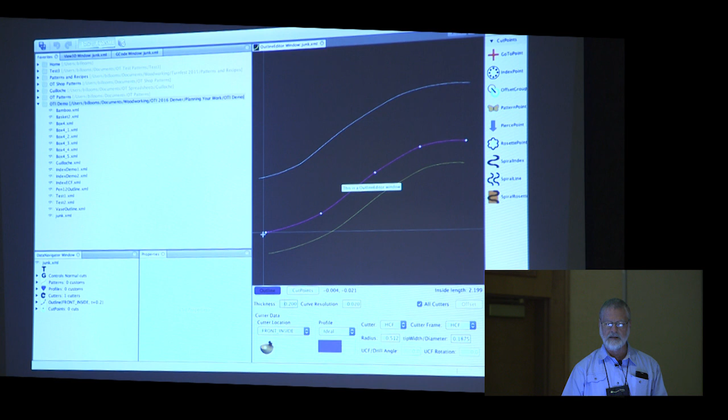The dots are digitized, so now I've digitized the inside of a shape. I could also clear that out and digitize the outside of the shape down here. If you can't see the arrow, yell at me, I'll grab the laser pointer. We can digitize the front inside, the front outside, the back inside, or the back outside. So here I'll make the outside of a vase.

You can take any of these points and drag them to change the shape to anything you want, and you're seeing the inside and outside of the curve.

Let me change this back to a 0.1 inch shape. If you don't want a point, just click it, drag it off the screen, and it goes away. Double click for more. If you want a sharp transition, like a sharp edge, more points are usually required to get a nice sharp edge, because that's just the way curve fitting software works.

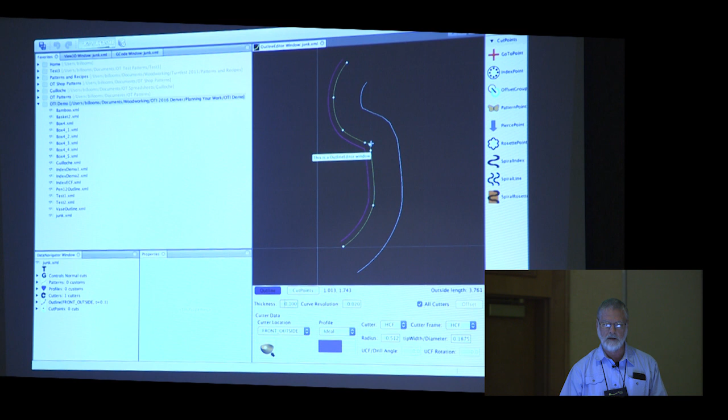If you want a sharp shoulder, see how I've got three points there that are fairly close together? That's how you get a sharper bend in the curve, because otherwise it will just try to smooth it out. That's just the nature of curve fitting. You can delete the points and take them off the screen.

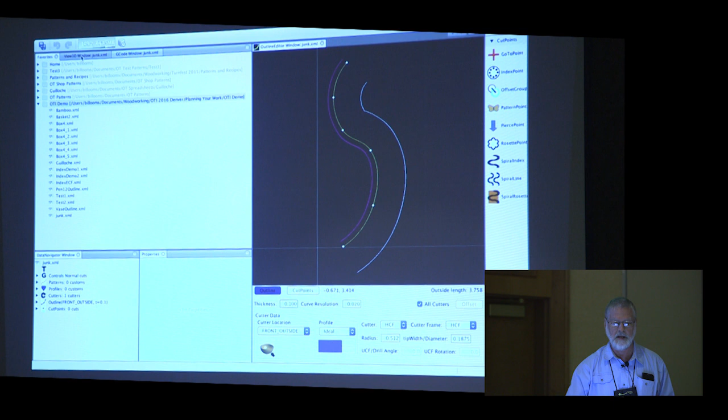Now, next thing you want to do is see what that looks like in 3 dimensions. Over here in the top left, there's a tab that says View 3D Window. So there's my shape in 3 dimensions with light sources on it.

Both of these windows you can zoom in, zoom out, and pan, and in the 3D window you can zoom and pan back and forth, and roll it around just by clicking and rolling it. There are several light sources in there, so if you get lost and don't know where you're at...

there's a reset. Now when you're looking at the 3D window, you can either be looking at the inside or the outside. Right now I'm looking at the outside shape, where my cursor is right down there. You can select either viewing the inside or outside.

Well, the inside of a vase like that isn't particularly interesting. It would be interesting if you're decorating the inside surface there. So if things don't look right, just make sure you're selecting whether you want to view the inside shape or the outside of the shape. And you can get rid of that grid if you want, or leave it there.

You can save that view. Just take a snapshot and it'll prompt you for where you want to save it, so you can grab a nice picture of that. So that's what the 3D view window is about.

The nice thing is you can change the shape and instantly see what's happening. If there's a little bit of a bump there and you say, well, I want to get rid of that bump, okay, so you can design a nice looking shape and save it.

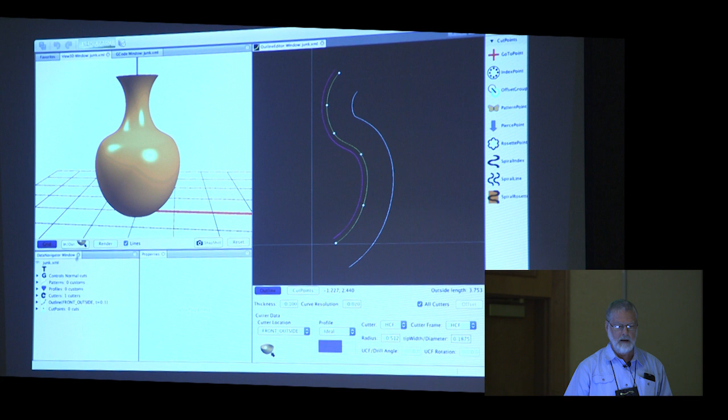Okay, now the next thing we want to do is add a simple cut. I'm going to go back and open a file that I had before, test 1. Here's a vase, and I've put a rosette point on it. Let me take that off and show you how you get that.

Off to the side, there's all sorts of cuts: index cuts, spirals, rosettes in particular. You want to use a rosette cut, like with the UCF, drag that and drop it on the curve. What these lines represent is the dashed yellow, representing the tip of your cutter that's spinning.

Now you have to know what the diameter or radius of your cutter is. Down here in the lower corner, we have a horizontal cutting frame. I could change that to UCF. Here's the radius of my cutter, which I happen to have now. Horizontal cutting frame, the diameter of the tip, and so forth. The profile on the tip, we'll talk about that a little more later.

So when I have a radius of 0.512 inch on my particular UCF, this white line is going to be 0.512 away from the outer curve. So anywhere that the center of the spinning cutter is, it's going to fall on that line, and that dashed yellow line represents the tip of the cutter. It's just going to be barely touching the shape.

That's sort of the reference point where you start. The yellow arc represents the cut at its very deepest point. The green represents the cut at its shallowest point, which in this case is up in the air.

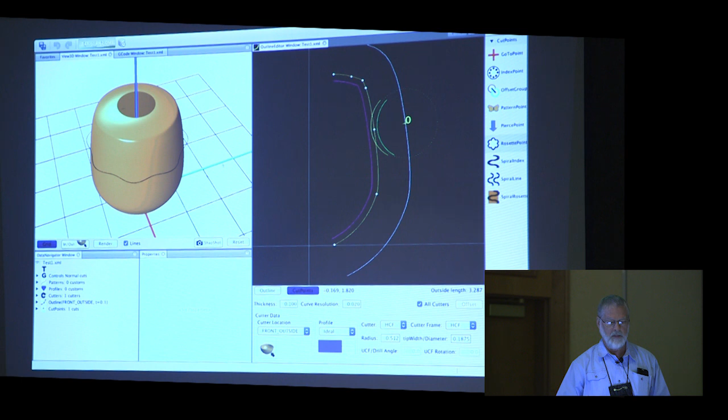And then you hit the render button, and you'll see what that cut looks like. And so you say, well, okay, that's kind of interesting, but I didn't intend for it to be cutting in the air. So we can change any aspect of that cut. In particular, I'm going to make it deeper.

Now, this Data Navigator window over here, you can edit any information that you're storing in the software, and this properties window lets you type in a different number. In particular, if I click on this outline, here's all my points that represent the shape. You can manually edit that.

For example, this very bottom point, it's not right at 0, so if you say, oh, I want that to be exactly at 0, come over here and just type 0, fine. Now that shape is all the way down at 0.

So you can select anything, and in the properties box here, you can edit just about anything. So the outline, you'll often want to edit. Now the cut point, first thing we want to, there's a lot of information we can change. We can manually change the location.

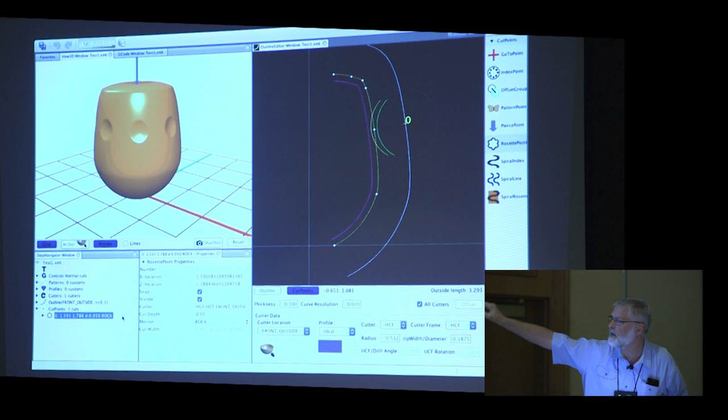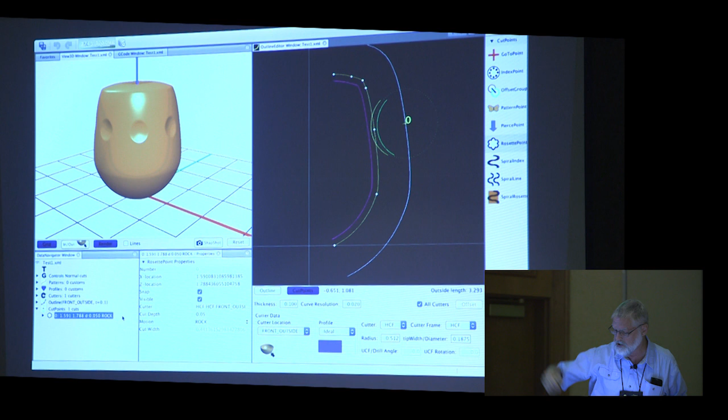We can have it snap to this white curve or not. We can make it visible or not. But in particular, I want to change the cut depth. I'm going to change that cut depth. Since my rosette has got a 0.1 inch amplitude, I'm going to change the cut depth to 0.1.

And so you see a couple of things happening. First, that yellow curve goes 1/10 of an inch in, and you say, oh, that's going to make a hole into the vase. So we want to make the thickness maybe not 0.1, but rather 0.15.

Now we aren't going to go through that. So the yellow curve represents the cut at its deepest. The green curve is just barely touching the surface. And you can see in the 3D rendering here, that's a much more pleasing effect, or at least it's more what I want. As you drag this up or down on your shape, you'll instantly see the end result of that.

So if I want this cut to be barely touching the very top of the shape, I just drag it up until I get it right where I want. Now you can just do that by trial and error, and you see that's about what I want.

Or you can take a look at that yellow arc intersecting with that little corner there, and that's another way to adjust that. You want another cut, you can either drag another one or just double click, and there's another cut right there. Okay, so you can just start stacking these things up and see what it looks like.

Now, let me just go through my notes and make sure I covered everything I want. Okay, Data Navigator, we talked about that. Let's talk about rosettes and the kinds of things that you can change on the rosettes.

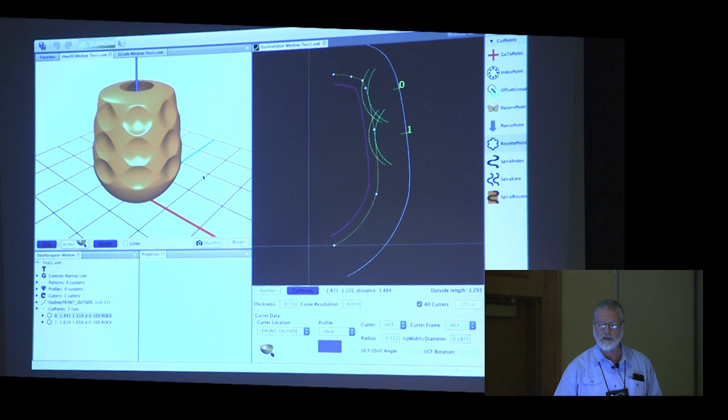And let me get rid of some of these cut points. Again, if you want to get rid of it, just drag it off the screen and it goes away. Or you can go in this Data Navigator window, right-click, delete. That will do it also.

If I click on this little arrow, these little enlarge arrows there on the side, you'll see more information. In particular, you'll see some information about the rosette. So we have a whole lot of properties that we can change on every rosette.

Let's talk about rosettes for a minute. I have never had a Holtz lathe that has had the ABCD designations. So when somebody says I'm using an F or a D or a C, I've got to go back and look at the table. That's just me, I apologize, I wasn't brought up with that. I think in terms of polygons, like Jean-Claude was talking about a six-sided hexagonal. So I call that a polygon, a six-sided polygon.

The inverse of that looks like a flower. You get that from rubbing on the backside or from cutting on the backside of the center, right?

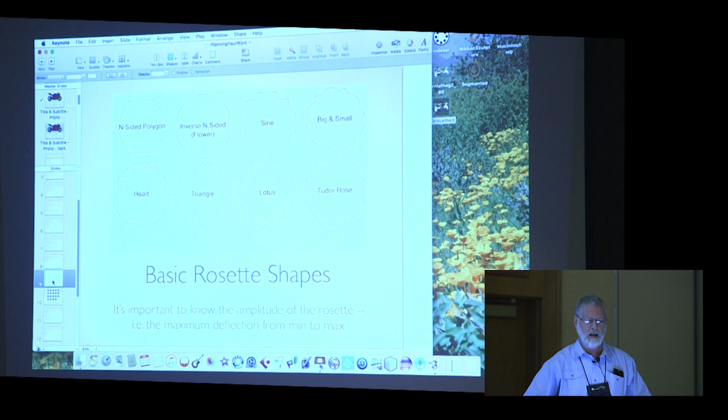A sine wave, where you've got a simple sine wave superimposed on the circumference of your rosette, combinations of big and small. Heart shape, which I'm told is really an F in your terminology. Simple triangle, lotus pattern, Tudor rose. These are common names that I use. If you like the Holtz nomenclature, I do have the full A, B, C, D, E, F, G, and you can adjust the parameters.

These are a bunch of photos I made for John Edwards when he was preparing his volume 6 book. These are all simulated on the software, and you can look at what the cuts look like. So we have all of those as well.

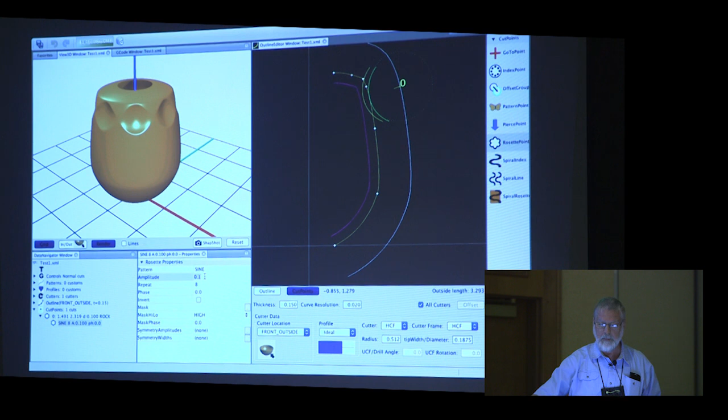So on editing rosettes, the most important thing you're going to want to change is amplitude. This is 0.1 inch. Repeat is the other thing you want to change—instead of 8 repeats, let's make this 15 repeats. You can instantly see the effect on your shape there.

You can change from a sine wave pattern to a polygon-sided one. Let's take a 6-sided pattern. There's your hexagonal pattern there. So you can change that.

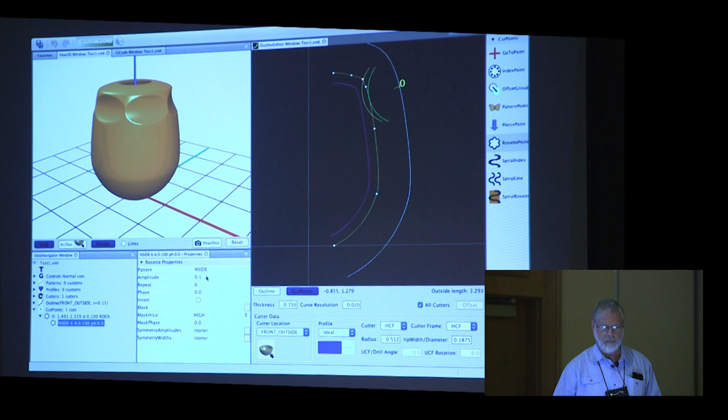You can change the amplitude. You can change the phase. Probably the best way to look at that is by adding another rosette, another cut point. If I want to change the phase, I'll change the phase of the second one by half a pattern, which in engineering parlance is 180 degrees.

It's not 180 degrees of shaft rotation, it's 180 degrees of the total pattern. Engineers think 180 degrees is an invert of the pattern. If you don't like that notation, you could just change it to a fraction of the pattern in the preferences of the program. So now you can move that up and see the effect of that. Add another one, put it back to a 0 degrees phase shift, and see the resulting look of the pattern.

Yep, there you go. Okay, so that's different kinds of rosette shapes. Let's talk a little bit about how we can space and plan the spacing. A few other things here.

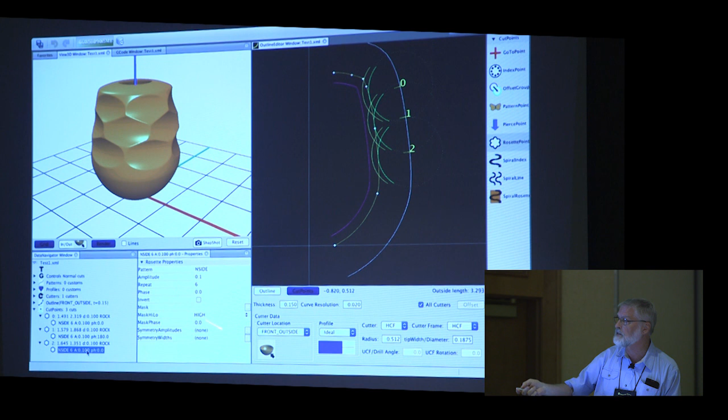Got to check my notes. On the rosettes, you can also invert the pattern, which is the same as putting the rubber on the back or cutting on the back side of center. You can mask certain bumps, skip every other bump, skip every third bump, and you can make some non-symmetry. We'll come back to that as we have time a little later, so that you don't have to have symmetrical cuts—they can be unsymmetrical.

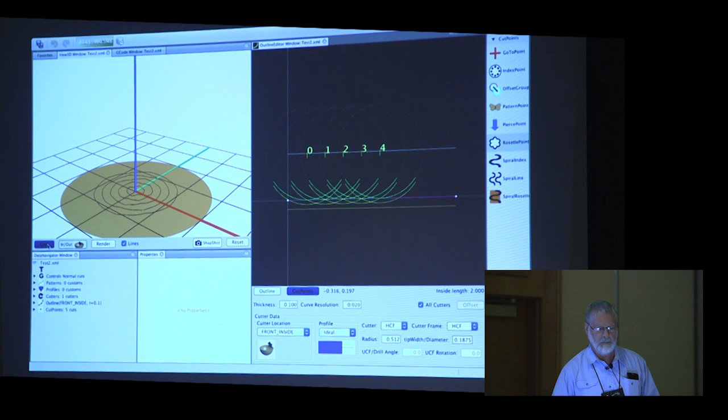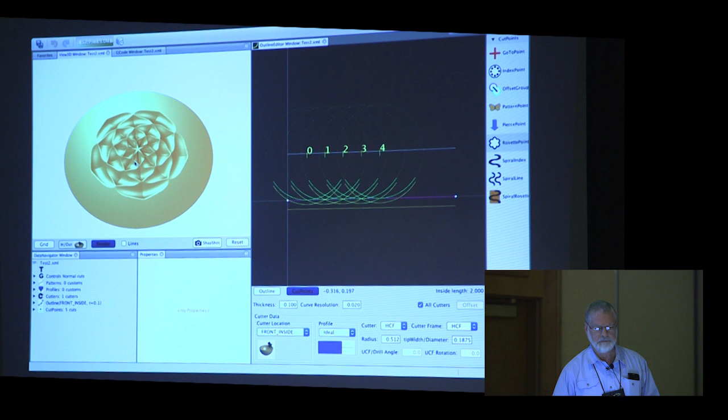I'm going to hide all the patterns except the first one and then talk about that. So I'm just selecting a bunch of them, making them invisible, redrawing it. The first thing you want to know is how close, where do I put that cut relative to the center? You'll get a different effect, obviously, as you do that. One of the most important things you've got to know is the radius of your cutter and then how deep it is. You can calculate how wide that cut's going to be. The deeper you go, the wider it's going to be.

If I just click on this rosette point, here in the grade area it's gray because you can't edit it, 0.441. That cut is 0.441 wide at its widest. I could also put the cursor from here to there and measure that, and you'll see 0.441. Zoom in a little bit. So measure that from there to there, and you see 0.448, 0.441 roughly.

So if I want that cut to just barely touch the center of the work, where do I put it? Well, the cut is 0.44 wide, so you move it 0.22 from the center. So I can just drag this and drag it over to 0.22. You'll notice in the 3D view, the cut is just barely kissing the center. Let me get a little bit better resolution, and that will become a much sharper image.

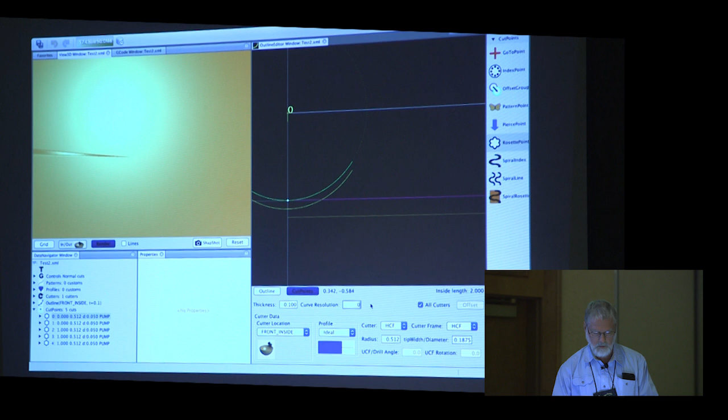I don't want 1.01, I want 0.01. That's just the resolution of the drawing. The finer the resolution, the longer it takes to render this, so I'm trying to keep it a very fast rendering.

So there you can see the cuts are just barely meeting in the center. You can do it based on the cut being 0.44 wide, divided by 2, so 0.22 away from the center. Or you can just trial and error until you see that, or drag it until that yellow arc just touches in the middle. That's another way to judge where it needs to be.

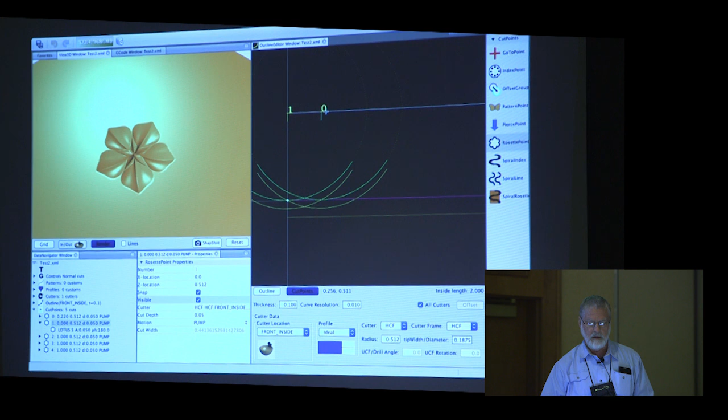Now when I start adding a second cut, let me unhide this second cut. So the question is, how far away are we going to put that second cut?

Well, if it's too far apart, you get that flat area, which might be what you want. Or you can drag it until that flat spot just disappears. So you can do the trial and error approach, or you can see that the yellow part of this second cut barely touches the lowest point right there. That's another way of doing it.

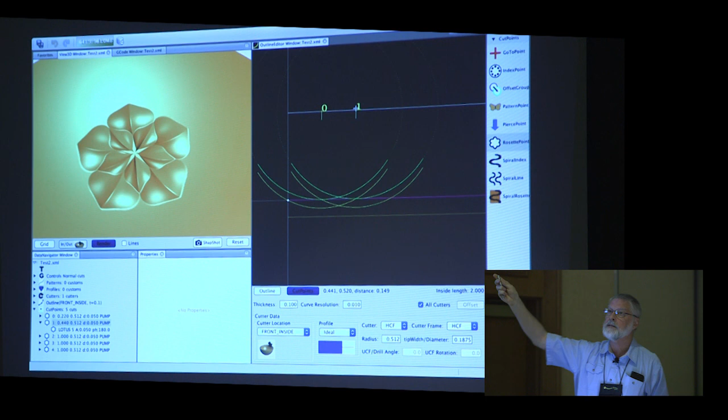Or you can say, well, it's got to be 0.44 because that's got to be the width of the next one. So you can go on all the way - let me just go back and get the entire thing. So there's my entire pattern.

Get a little better resolution again. And that's with pumping... what pattern is that? That's a lotus kind of pattern, which came from one of Jon Magill's rosettes. That's a very nice, attractive pattern - kind of looks like a nice flower.

So if you're on a traditional mechanical machine, you get your cutter centered in the middle, then you go 1, 2.2, make your first cut. 1, 2.2, so every cut is 0.22, 0.22, 0.22. Back it off - you can either zero your dial and do it again, or no, it's 0.22, 0.44, 0.66.

You're dialing it, and now you're getting your cuts uniformly spaced, and you're going to get very crisp, clean cuts at the tops because you're just barely cutting no more than you need to get rid of that plateau, that flat surface. Okay, so that gives you some optimum spacing.

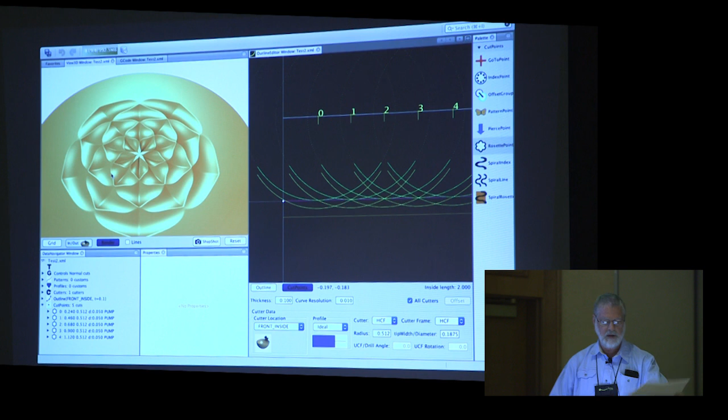Let's move on and talk about something else. Instead of rosettes, let's talk about indexing. So here's a cylinder, and just reset to the view on that.

And to get index cuts, there's my lines - there's little lines where the cutter is going to go. To get an index cut, you take not the rosette point, but the index point over there. Drag it onto your line, and oopsie.

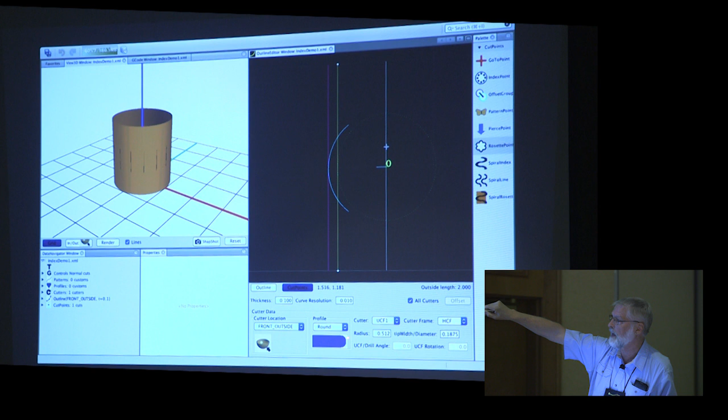Now my cutter, I'm still using UCF, and now I'm using a rounded end cutter instead of a very sharp pointy cutter. You have a whole host of built-in selections, and you can make your own - you can get it 60 degree, 90, 120, 150, flat, round, concave, and we'll see what those look like. Now when you render that, you're going to see, as expected, a nice scooped effect.

You can get rid of those lines. We can change the number of repeats on that. Instead of 15 repeats, let's go to 30 repeats. And you say, well, I want to keep increasing that number until they just barely touch.

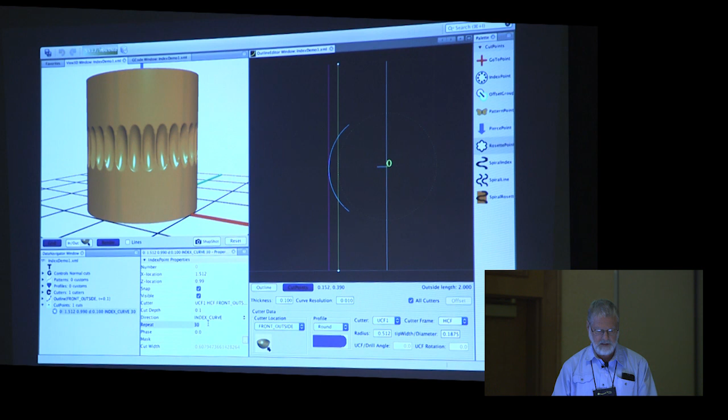You can just do that by trial and error, or you can do the calculated approach. Okay, well, that looks pretty nice like that. If you want to have the width and spacing about the same, it would be about half of that. Change from a round point to a flat point.

And so there, you see the effect of any cutter. And you can make your own profiles - we'll talk about that a little later also.

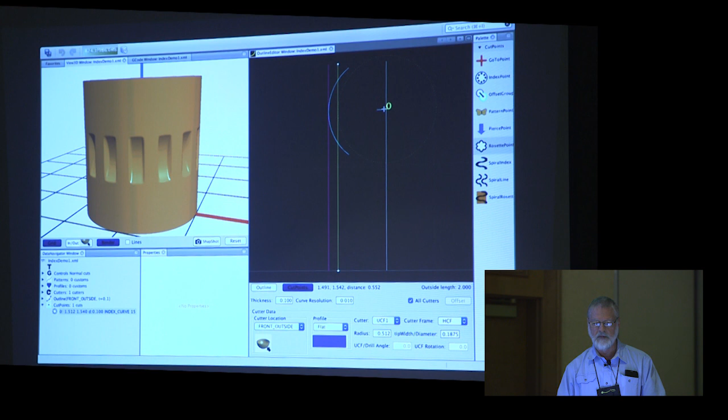As you drag and drop your index point, move that up until it just barely touches the top. And I do that by taking the deepest part of the cut, and it's just at the very top of my cylinder. Now add another one.

Oops, not that one. I want to add another index point onto that, and just barely get those points to touching. And again, how wide is that cut? It tells you the width of that cut for the depth is whatever that says at the angle, 0.607. So that's the width of that cut.

So you can either know that you got to move your cutter the full amount, or you can just move your cut until the blue lines just barely touch, and then you know your cuts are just barely touching. So several ways of doing anything. Now let's go back to using multiple cutters.

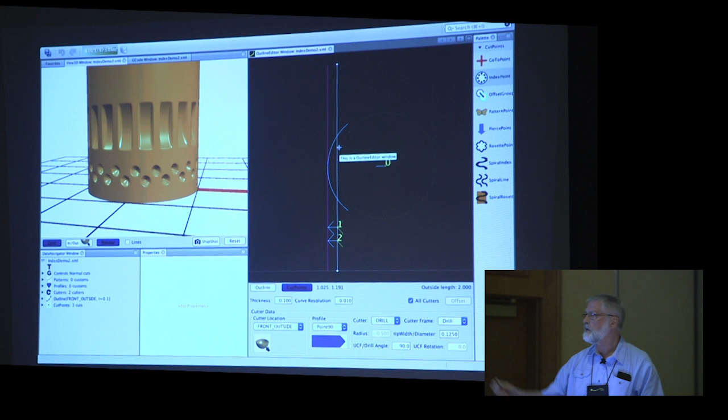Okay, so what I've got here is several index points. The first one is using a UCF cutter right there that's got a flat tip, 0.512 radius on the cutter, and I'm making the first cuts.

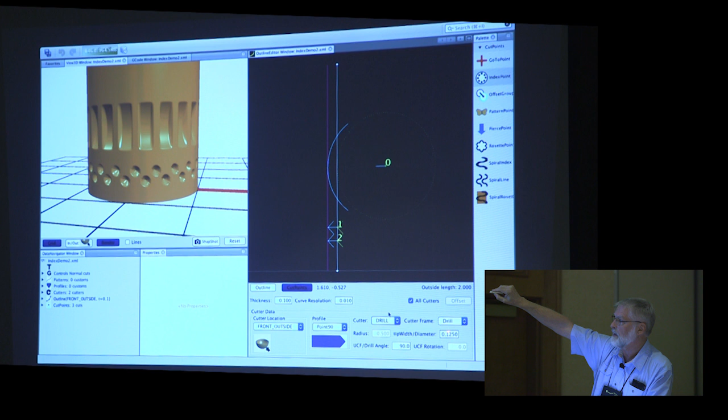Then I'm coming in with a drill frame and making two additional cuts. The drill frame has a 90-degree point and a tip width, the diameter of the tip is 0.125, making a cut there and making a second cut where I've changed the phase to half a pattern offset. So you can see the effect of moving this, changing it, and deciding how close you want that to be to the first one, how close you want it to be to the second one to achieve whatever effect you're after.

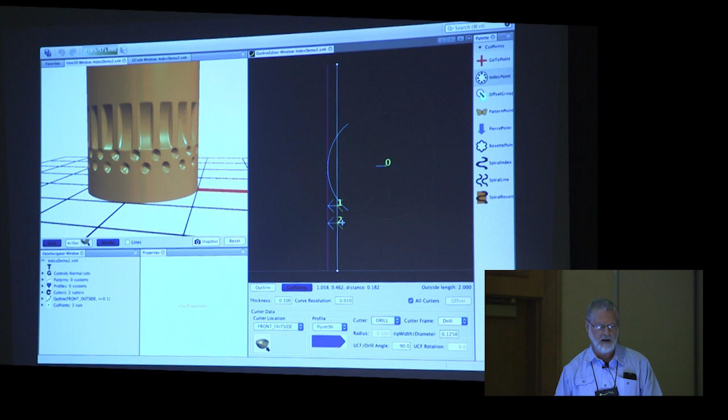Now, let's go to a vertical cutting frame, or a UCF that's rotated to be in the vertical mode. That gives the basket weave, if you like that term. I call it a bricklayering effect.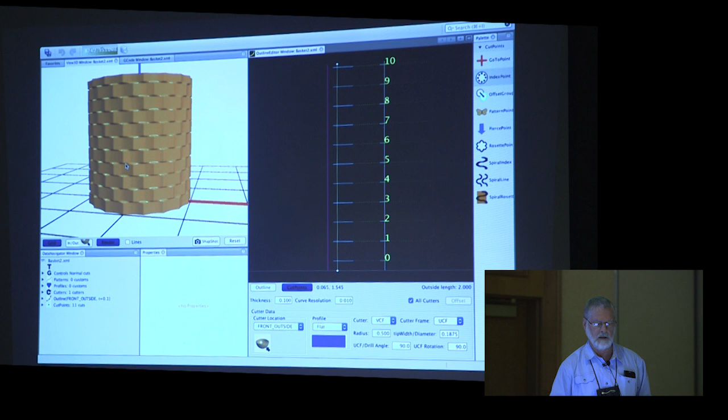So what I've got here is I'm indexing, doing a cut, starting at the bottom, taking a cut, taking another cut. So the question is, how deep do I make the cut so that I get just a very nice sharp tip there? Well, you can play with that. You can use a spreadsheet, I've got some spreadsheets on my website. You can calculate that, or you can do it by trial and error, so you get just a nice, sharp, crisp, clean edge on there.

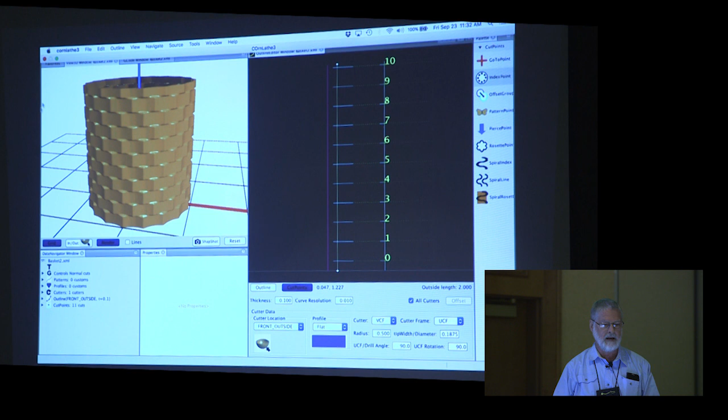You can also change the tip to be a concave cutter and get the bamboo kind of a look. And so there's a kind of a classic bamboo cut.

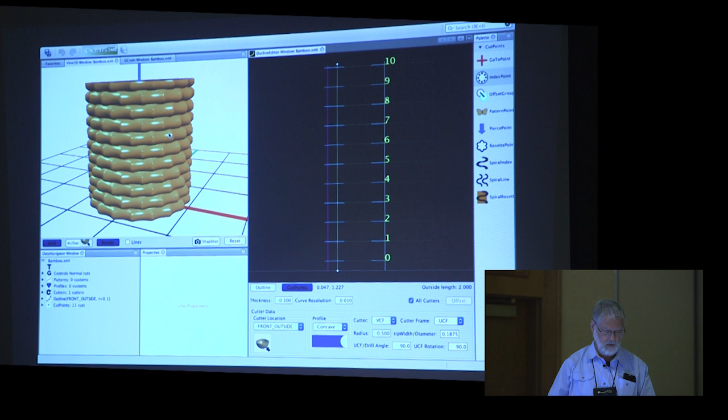If you wanted to add the little knuckle on the joints, then you could come in with the drill frame with a little pearling tool and make your joints and see what that looks like and get it the way you like. Eccentric cutter frames.

Where is that? Indexing with eccentric cutter frame. Now, get rid of that grid. So here's the flat top of a box.

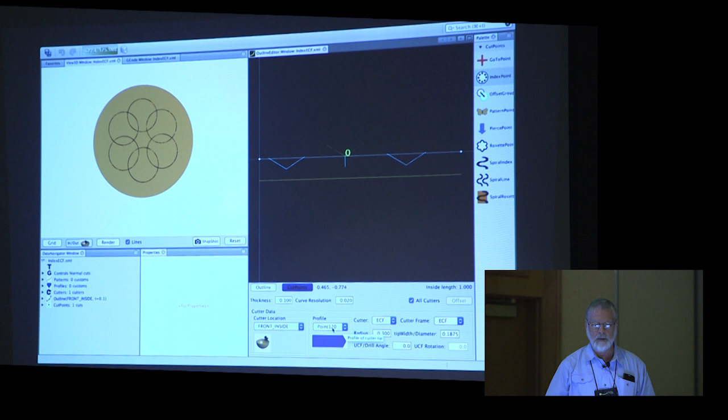I've got an eccentric cutting frame. The radius is 0.3 inches, and you've got a 120-degree point on that. Notice that isn't the way you'd really want things to meet. This is what it would look like. And, well, maybe that is what you want to look like. That's actually kind of attractive, too.

And you can get rid of that flat spot in the middle by moving this closer in. See what I did there is I just moved it until that blue edge touched the center, and now my flat top in the middle went away. But notice I got a flat top there again. So then you can just change your radius by trial and error, or by watching the paper chuck plot.

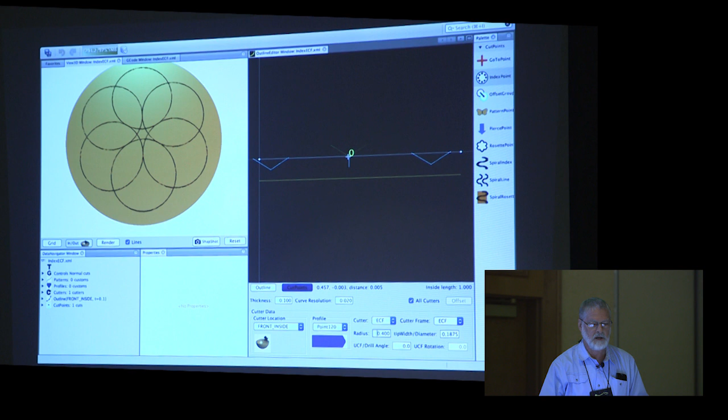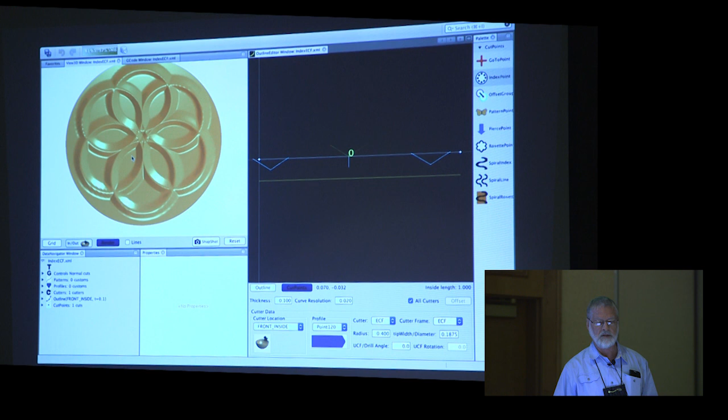Let's change this to a radius of 0.25, no, we want a bigger one probably. Radius of 0.4. Okay, and now we can move that in until those lines just touch, and render that. And then you can play with the depth until you get the true barleycorn kind of a look on there. So again, this gives you some trial and error, or you can do the calculations however you want. The key thing is you can see what it looks like before you go to the shop and cut it.

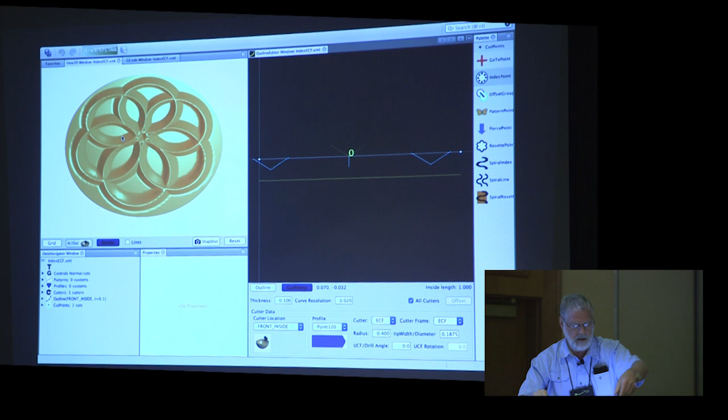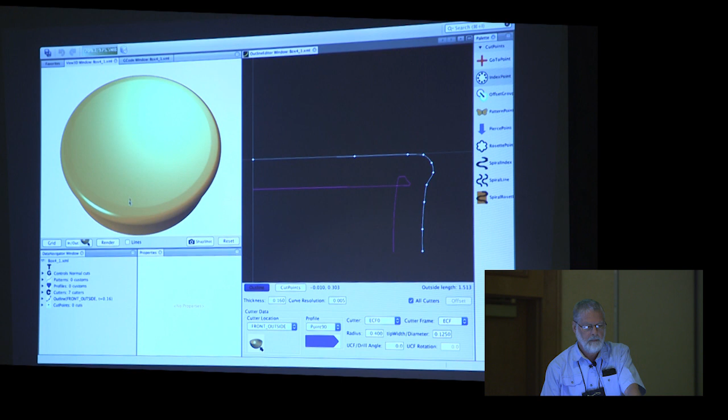So I started with this, and I'll take you through the process of how I use the software to design that. The first thing you need to do is get the outline. So here's the outline of the box, basically, well, half the box, the top half, the bottom half.

You get it until you get a nice, pleasing shape. And I said, okay, now I know how much I have to plane turn this to this outer dimension. Well, I've got 2-inch diameter faux ivory stock, actually about 2.1-inch diameter. So that dictated my maximum diameter here. How far do I want to hand turn that in to get a pleasing shape where you can measure the difference between those two. So now I've got the shape the way I want it.

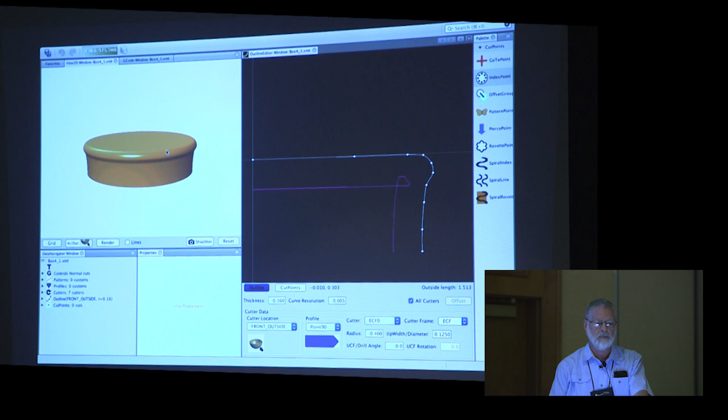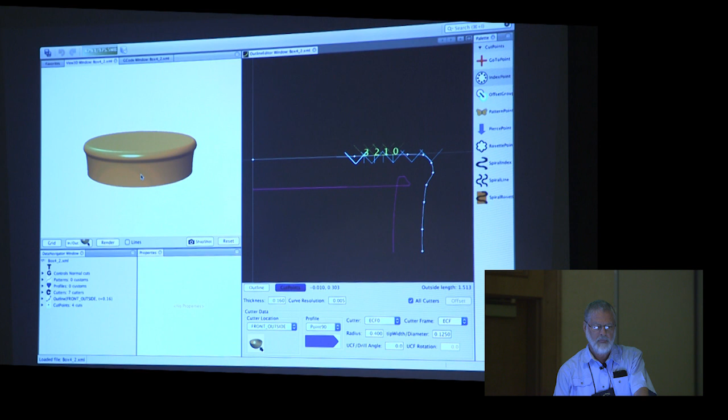So let's work now on the first set of cuts on the top. And for this, I'm going to go to a spreadsheet. I should have had this called up before. I apologize for not having that queued up in advance.

With the barleycorns, whether you're on a top or the edge of a cylinder, there's 2 different formulas for figuring that out. These spreadsheets I uploaded about a year ago with the math behind them. I'm going to start out with the center of the cutter at 0.82 inches, and I want it to just barely fall off the edge to get the effect I'm looking for. So I'm entering anything in green as 0.82 inches from the center. My cutter is a 90-degree point. In this case, I want 24 circles around there, and I want 2 barleycorns included in the circle. Now this drawing is not accurate, but that means how many barleycorns are within one circle. Let me hide the other cuts temporarily so you can see just that first cut.

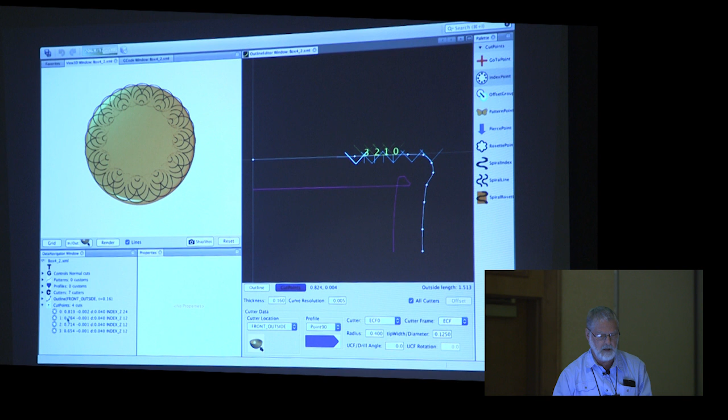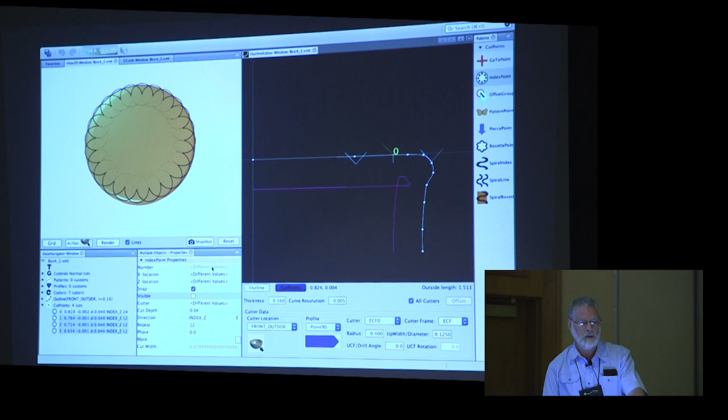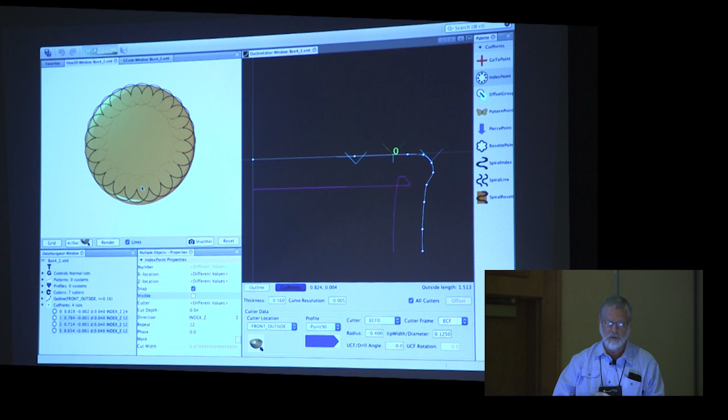Okay, so within one circle I got 1, 2 barleycorns within. And it will tell me that I want the cutter radius on the ECF to be 0.212 inches. So you take your dial caliper and set that ECF for 0.212 inches, and then you will find that the lines just coincide as you would want them to, and you can render that and see what that looks like.

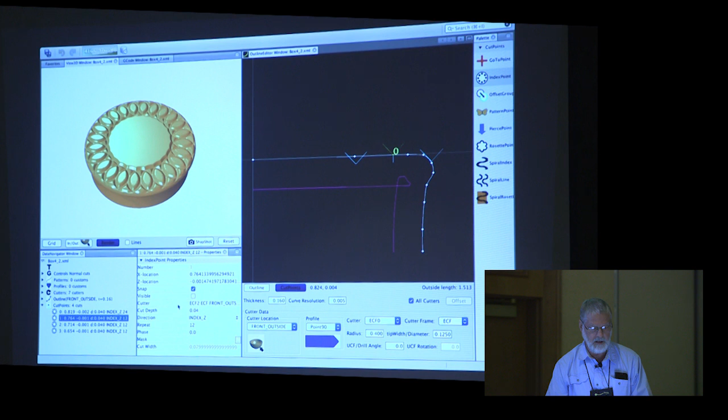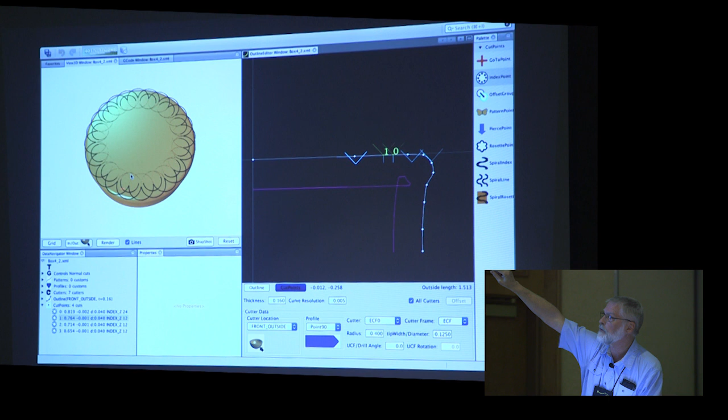Now these aren't true barleycorns because I'm putting additional cuts in there. If you go back to the drawing, it's hard to see, but you've got a full diameter circle, a 3/4 diameter, half diameter, and 1/4 diameter circle, each of them offset. So your second cut here, I'm going to stick with the lines for a minute, it's probably easier. I've offset the cutter so that the inner edge is coincident and the diameter is 3/4 the first one. Then I add this next cut, and again the inner cut is coincident, and now it's half the diameter, so it goes right through the center. Then the very last cut is 1/4 the diameter.

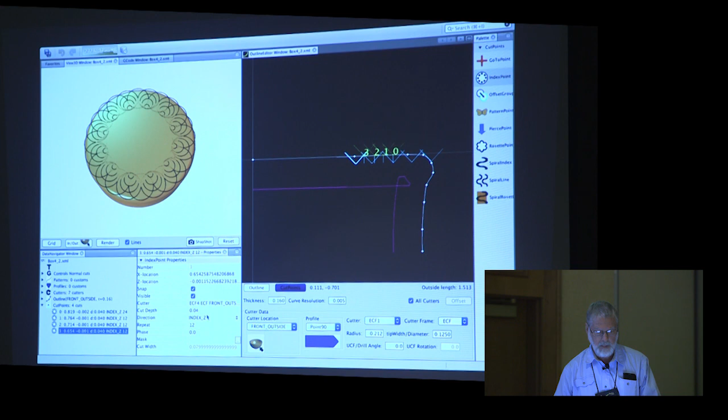Now, each of these, the ECF, the first cutter had a radius of 0.212, the next one 3/4 of that, half of that, and a quarter of that. When I did it exactly the way it was supposed to be done, I noticed something interesting happening that I didn't like, and I'm going to zoom in so you can see that effect. If I go to that cut, it should have been 0.053, and what happened there is, can you see those lines are coincident on the inside, but right there I did not like that effect. So by trial and error, I realized, okay, change that radius to 0.043. Now I'm getting those lines right there to be coincident. Now when I render that, it has a much more pleasing look.

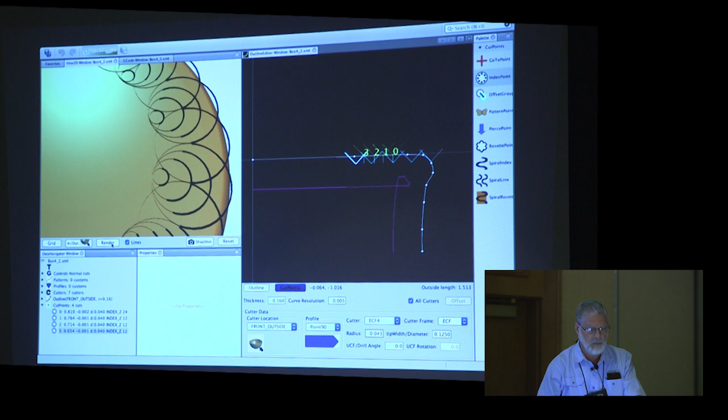And the more cuts you get, the longer it takes to render. So there's that outer ring, and I kind of like that effect where it was not the scalloped edges, but the cuts hanging off the edge.

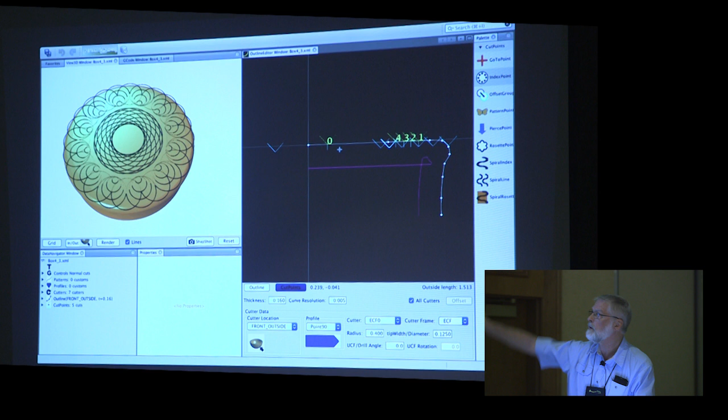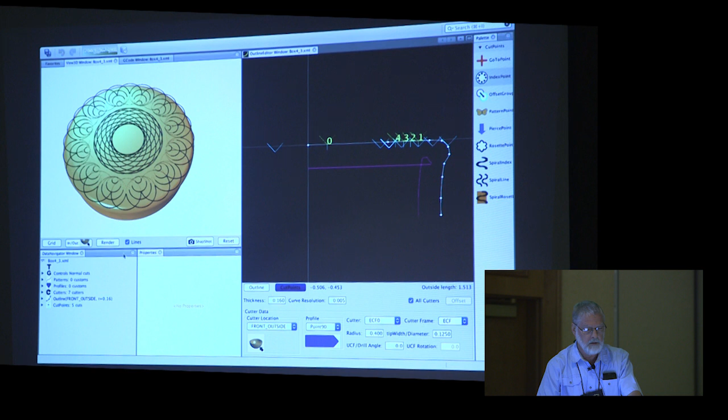Next thing I wanted to do is the inner cuts. So we'll add those inner lines. There the ECF actually spans, it's cutting both front and back, so the center of the ECF is right there. These two little blue V's represent the cut from that cut. I wanted right there, that point to intersect so that I did not have a flat spot between the inner feature and the outer feature. And I wanted the plateau in the middle to be big enough to set that little black opal. So that pretty much set the dimensions there, and then it was a matter of getting the repeat, and you can render that and see what that is going to look like.

But I'm still using the same, was it 24 or 12? I forgot what I went with on that one. I went to 12 repeats on that, so I could get a little bit finer, well, a little bit more pronounced detail. It was too fine a detail.

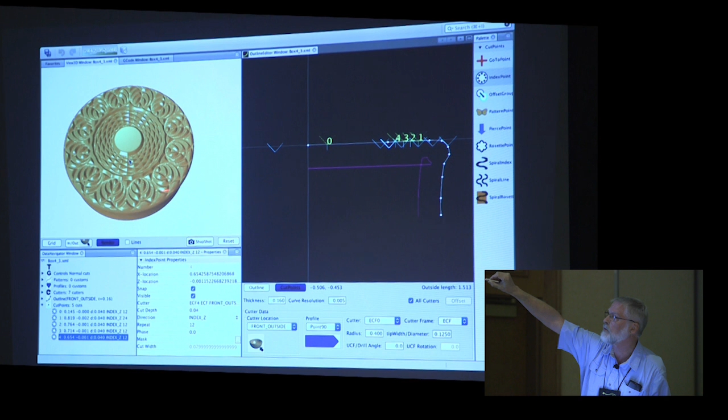I wanted it a little bit more pronounced to be consistent with what I did there. The next thing we do is take a simple end mill to mill out that area, just two rings of the end mill cutter, to bore out the area where I'm going to set the black opal.

The last thing we need to do is get the edge of the box. For the edge of the box, I'm using a drilling frame, and as soon as it quits rendering... okay, so I'm using a drill frame there with a 120-degree point rotating single flute cutter that John Spencer made.

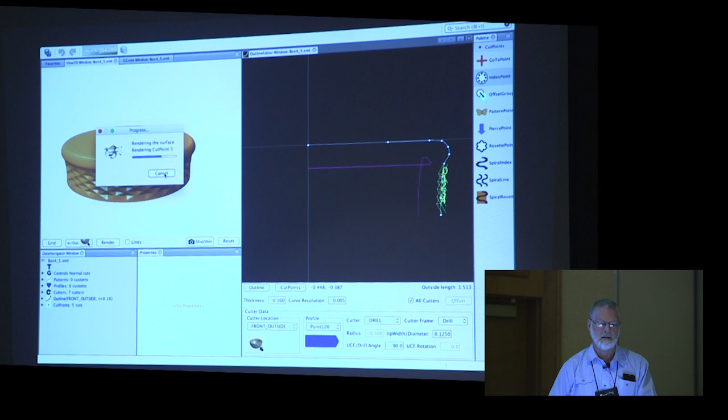I like his cutters a lot. He's not a paid advertisement, I just really like the cutters that he's made.

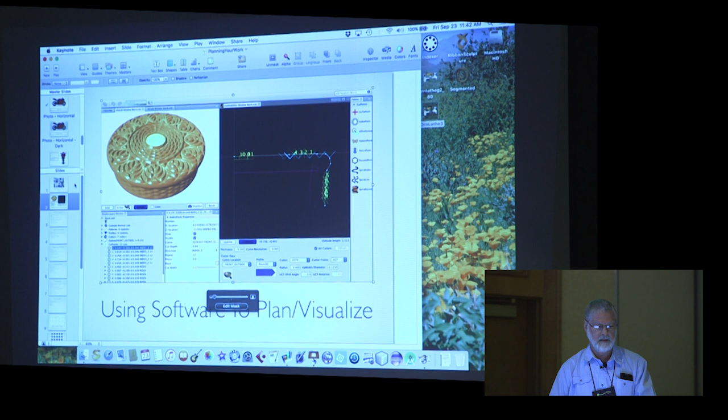And now we've got that effect, and the whole end result you saw in the other photo, so you can compare. Okay, there's the entire simulation - it just takes quite a while to render, so I'm not going to take the time now to compare it to the real photo, but you can see the real thing outside.

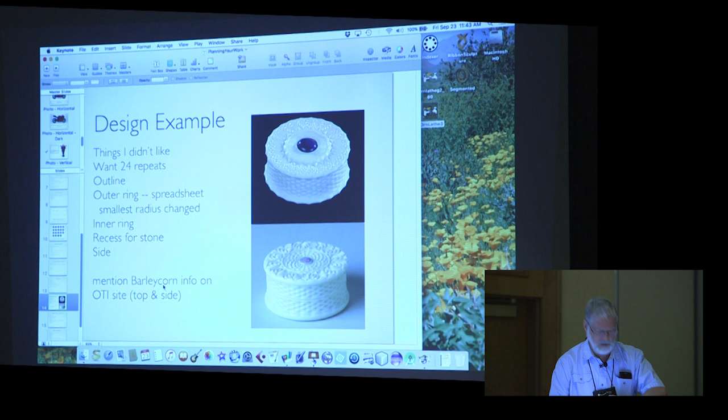All that barleycorn spreadsheet data is already loaded on the website. How are we doing on time? Okay, we've got time for just a couple more things.

One of the windows you can pull up on the software is a rosette viewer. If you want to see what a rosette looks like and play with it, you can call it up and adjust the amplitude - I'm exaggerating the amplitude so I can see it.

So you've got the ability to change the small bump superimposed on the big bumps on a Holtz J pattern, for example.

More importantly, you can design your own pattern. I've got a pattern editor. The pattern editor has you define one repeat of the pattern - in this case, there's a sine wave pattern. You define one repeat, and it repeats that as many times as needed, wrapping it around the circumference of your rosette. So that's what the sine pattern looks like.

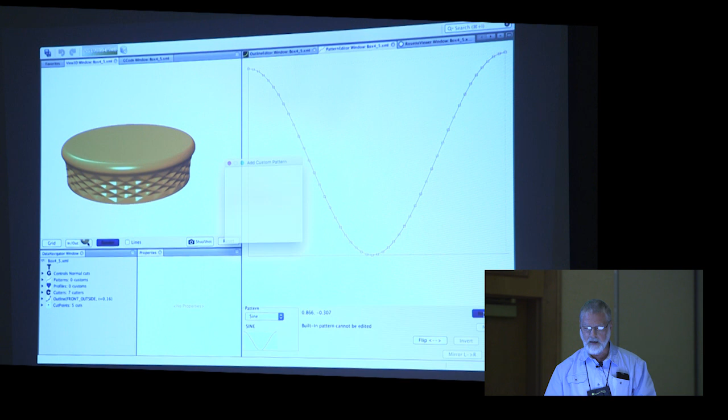If you want to make a new pattern, you can do it with curved arc segments, straight line segments, or curve fit to dots. I'm just going to do a simple junk 1 pattern and start putting in some points.

This is going to look ugly. So, that's the pattern I want to repeat. What does that look like in a rosette viewer? Let's go down here and grab that pattern. Well, that's pretty ugly, but you can at least see what it's going to look like.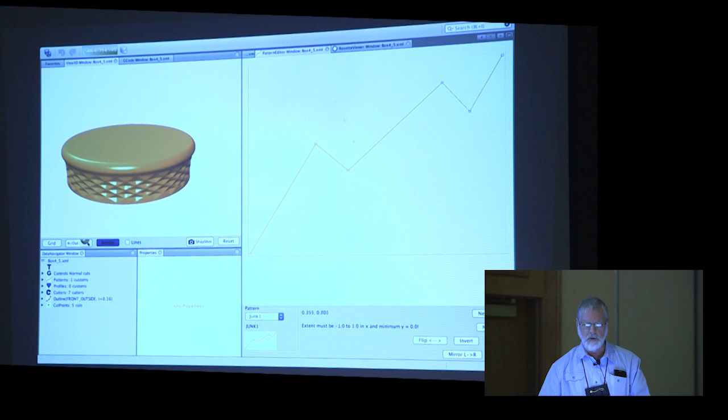Or you can say, let's clear that and make something a little bit more useful. If you get one side done and want to mirror the left side to the right, now we've got something like that. We can put a nice point in the middle, drag that point, and mirror it again.

Now we can take a look at what that's going to look like. Well, that might have some future, especially at the big amplitudes in the center of a shape - that might have some interest.

Once you get a pattern that you like, you can write it out to a file. Click on this Write Rosette Data, and it will give you a table of degrees versus radius. So if you want the maximum radius to be 3.5, which is what the MDF Rose engines use, and you want the data every half degree or whatever, it gives you a tab delimited file you can read into Excel.

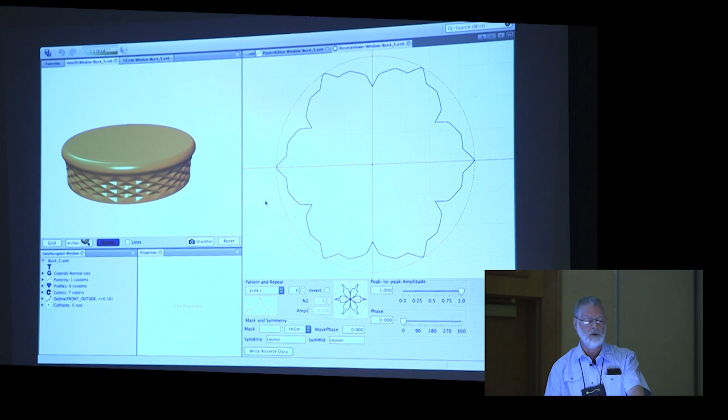You can take it to somebody who can massage the data to cut the rosette for you. The point is you can design a pattern, and once you get one that you like, you can save it.

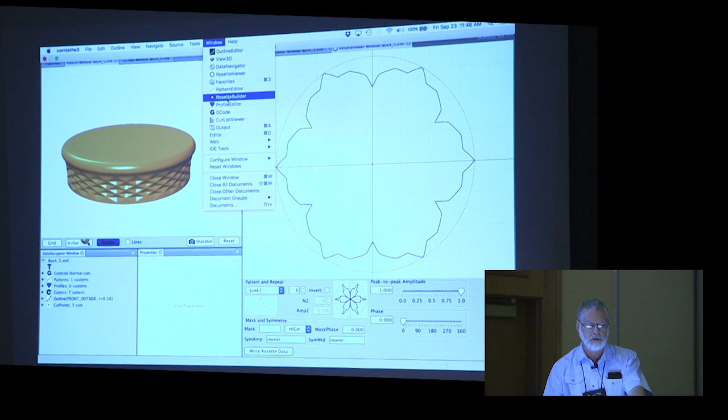You can also define custom cutter profiles. Let's go to the profile editor. So here's a 90-degree point - the point is pointing down in this case - or a round point.

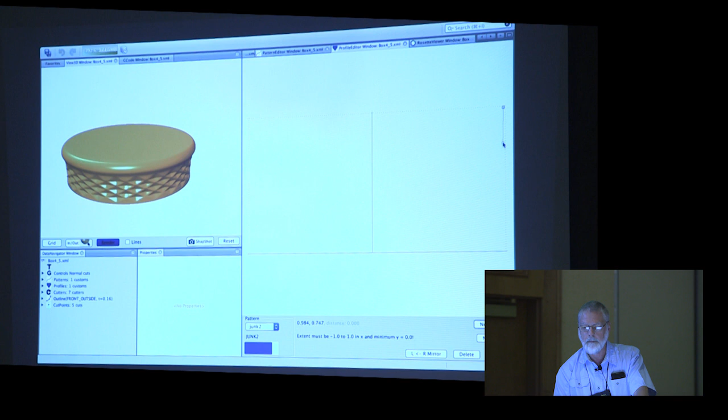Now, if you want a stepped profile, we'll call that junk 2. Let's say we want a stepped profile where we have several different radii, kind of a staircase effect. Oops, let me get that point off, drag it off.

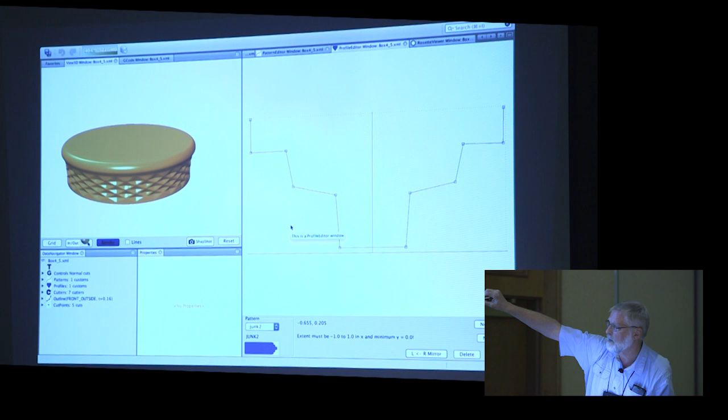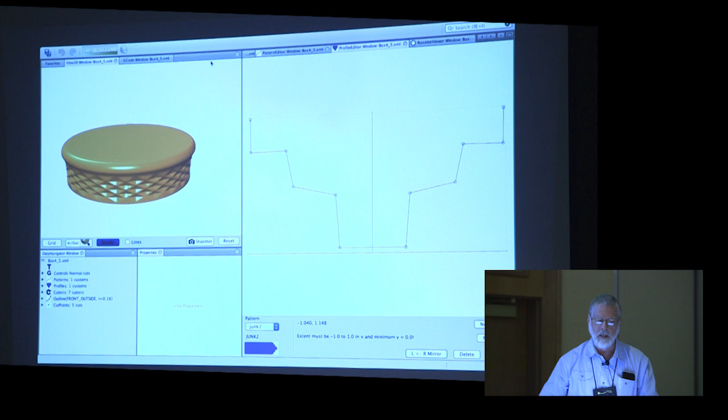Kind of crude, mirror left to right. You can see down at the bottom a little indication. You might want to use a stepped pattern, like Josh uses a lot in some of the patterns you've done. This is just crude, you'd want to refine it more. You can put it in a drilling frame pattern to see what it looks like. What else can you do?

Spiral lines, like a straight line effect. Here's getting rid of some windows here. Here's an outline of a pen that I happen to have in my pocket, or you can look at it later.

It looks like that, and it's got multiple cuts in this peacock pattern. Each one, instead of having a rosette to define it, has a pattern bar. This pattern bar is a half sine, lump-de-lump-de-lump. It's got an amplitude of 0.094, calculated to just barely meet with so many repeats around the pen, and a period height of 0.5 inches.

So you could render that. I'm not going to take the time now, but you can work on your patterns. You can do the same thing on guilloche kinds of things.

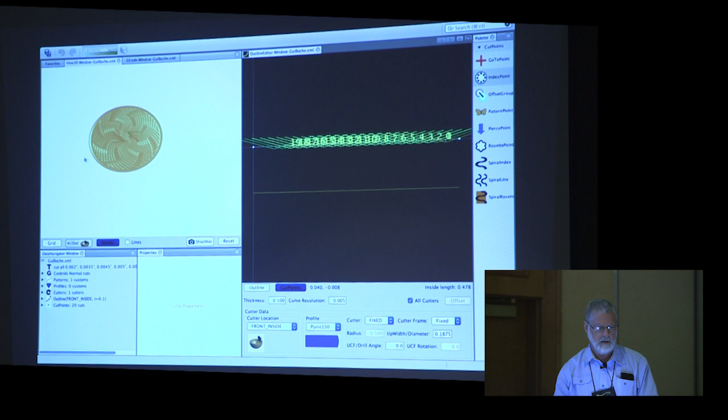And this doesn't take too long to render. So for working out a guilloche pattern, get the lines off. Okay, so there's a nice lightning bolt zigzag kind of pattern. Just trying to get the light to hit that right.

What else can we do here? Combinations of rosettes. You can, and let's also talk about non-symmetrical patterns.

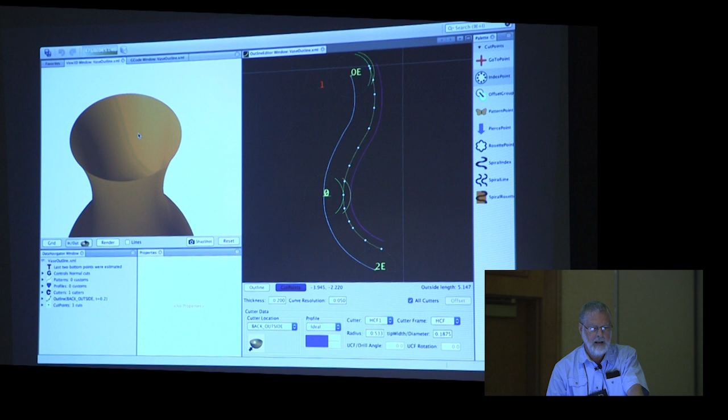Here's a vase, and it's not symmetrical. Kind of lost where I'm at here. So while I'm talking about this, let's start the rendering. This takes a little bit of time. This is the black vase that I have out there.

It's a 4-sided rosette, just like you might have with your MDF rose engine, but instead of 4 equal sides, one side is smaller, two sides are in between, and one side is longer. What I'm doing is spiraling that around the vase, from the fattest part toward the top, and from the fattest part toward the bottom, moving over every 50 thousandths of an inch, cutting, moving over, cutting it.

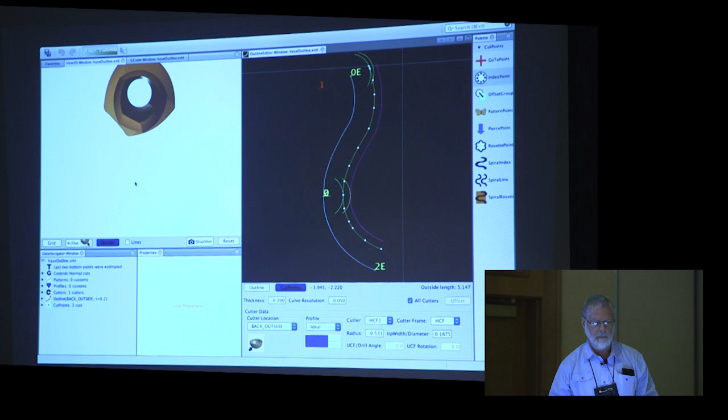And so that's the effect. From the top view, you can see the effect of the rosette. It's 4-sided, but not symmetrical, and that gives the interesting effect of having one side concave and other sides convex. Take a look at the little vase out there, that's kind of a nice effect.

So this is a spiraling effect using 2 spirals. The first one twists up by 30 degrees from center going to the top, and the bottom one only goes 20 degrees because it's a shorter distance.

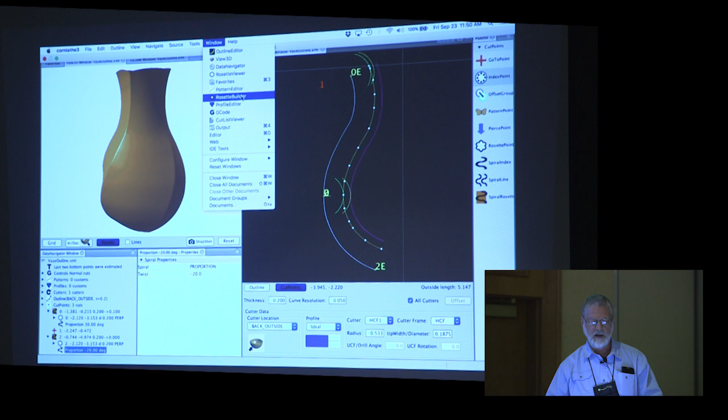And we can also add and subtract rosettes. This is still kind of a work in progress. If you want to have a sine rosette, let's just make that 30 bumps. So that's what that rosette would look like.

And I want to superimpose that onto a 4-sided rosette. So let's take a 4-sided rosette. Here's my first rosette, 30 bumps sine, here's the second one, 4-sided, and down here I'm going to add the two together. So that's the kind of effect you have, it's kind of a bumpy 4-sided thing.

You can take up to 3 rosettes, combine them by adding, subtracting, minimum bump size, maximum bump size. And when you're all done, you can either use it to cut something to see what it looks like, or again, write the rosette data out to a spreadsheet in tab delimited format.

Okay, that's about G-code output. I use the G-code output. Once I have something I like, I hit this little red button at the top that says write G-code, then I hit the start button on my machine and it makes the piece. It's not quite that easy, but come talk to me later on that.

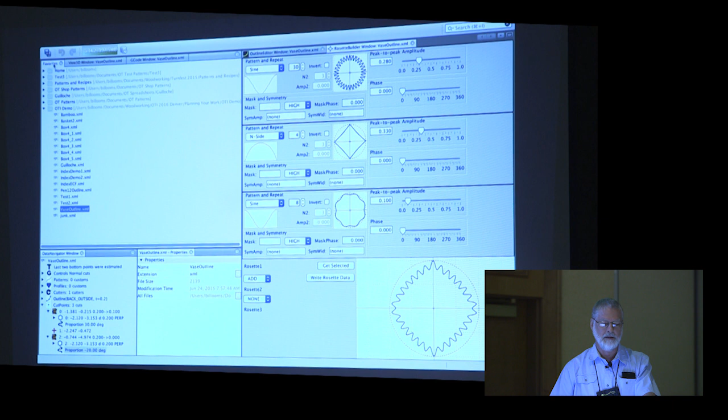So many of you won't use that aspect of the software, but it's built in for those that have asked for it. Okay, back to...

The question I get most often is, why don't you put that software on Windows XP, Windows Vista, Windows 7, Windows 8, 32-bit, 64-bit, 16-bit, 8-bit, anything, iPhones, iPads, whatever. And the answer is, I don't have enough time to do all of that, frankly. Microsoft, every week or day, issues updates, and often something doesn't work right.

With Apple, when I get an update and it doesn't work, I take it in, figure it out, get it working, upload it onto the site, and it's there. I do have a Windows XP machine, but I don't even have machines with Windows 7, 8, or 10 on them. So for me to offer a version of the software that's guaranteed to work, I can't do that, it just takes way too much time.

The software is uploaded onto the GitHub website. If somebody in the club wants to take responsibility for compiling it on Windows 10 and making sure it works okay, that would be great if somebody wants to do that. I just don't have the time or materials to do that.

People say, well, I can't afford a Mac computer. Well, the last Mac I bought in the shop, which runs this software just fine, I think I paid $350 for a used Mac Mini. Use your standard keyboard and monitor and everything like that. So that's what many of the people using the software now just bit the bullet and bought a used Mac Mini on eBay.